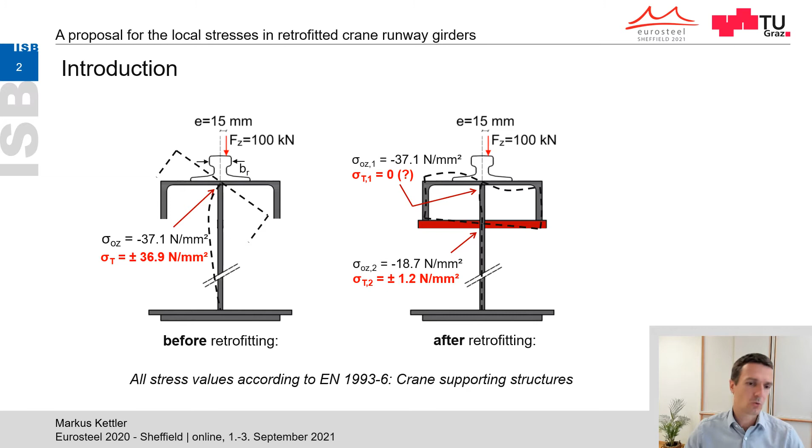So we started with finite element calculations. You see here the finite element model before retrofitting. So the girder without reinforcement plates, loaded again with 100 kilonewton, and in the diagrams we see the results. We see the vertical compression stresses over the length of the girder. So x0 means the position of the load introduction, and we have the results for 2 positions.

On the left we have it for position 1, which is within the box section upper flange, and position 2 is 30 millimeters below the reinforcement plates. Notice the shown results are without reinforcement plates, these dashed lines. We see the distribution of the compression stresses from concentric loading in the mid plane of the web, and on the compression side we see larger stresses.

So this part here between the red and the green, this is the additional torsional part that can be seen here. And in position 2 we have more or less the same behavior. We have smaller stresses in compression from concentric loading and also smaller torsional parts. If we now add these reinforcement plates, so after retrofitting, we get the following results.

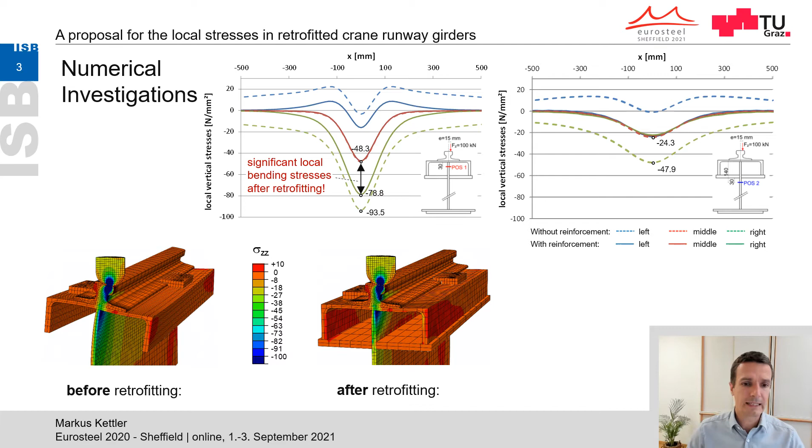So we moved on and did experimental tests on the real girder. We see the girder here, and in the right photo we see the eccentric load introduction on the rail with this device. We see here the reinforcement plates, and the left photo is taken from below, and we can see the strain gauges that have been applied.

So these 3 strain gauges here are the measurement devices below the reinforcement plates, and these 3 ones are within the box section upper flange. Notice we had to cut a small hole into the reinforcement plates to be able to install the devices.

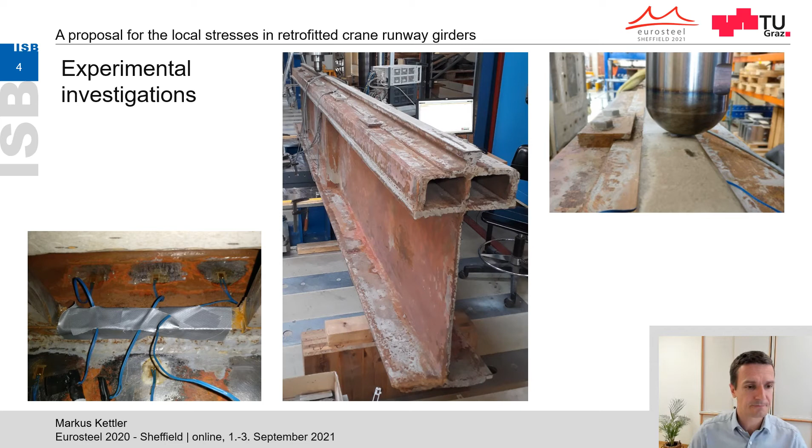These are the geometric properties of the girder. The tested part had a span of approximately 2.2 meters, and we had here transverse stiffeners at the supports, loading in the middle. The height of the girder is approximately 750 millimeters.

The rail is an A55 rail, and it was measured in detail, as you can see here, and the abrasion was approximately 3 millimeters. These geometric properties, as well as the properties of the geometry of the weld and the web plate and the upper flange, were taken into account in the finite element models.

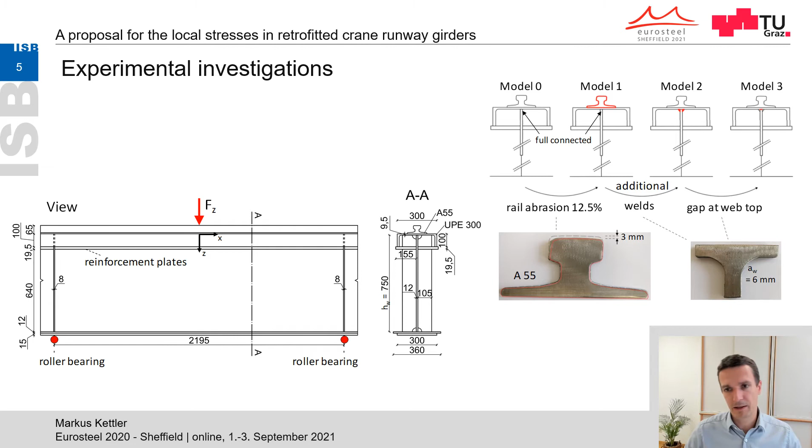Here we see the applied strain gauges. In total we had 12 strain gauges installed, 6 at position 1, these are the red ones within the box section upper flange, and 6 in blue at position 2 below the reinforcement plates, 3 on each side. Here again you can see the small hole that was cut into the reinforcement plates.

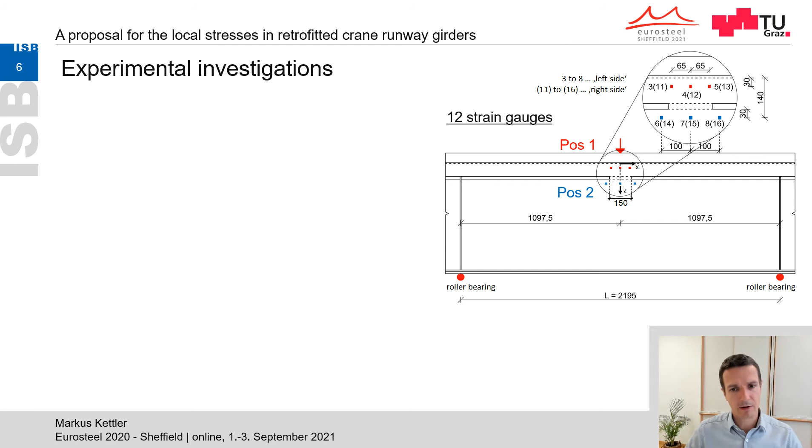To the results for position 1, this is within the box section upper flange. Again, the solid lines are the numerical results, and we see here the measurement values. So this is the girder after retrofitting, so at the end of its lifetime, and we still see within the box section upper flange significant bending stresses. So now it is confirmed not only numerically but also experimentally that we have significant bending stresses within this box section upper flange.

At the same time, on position 2, we find that there are hardly any bending stresses, so we have more or less the same results on both sides of the web. This is in line with the Eurocode predictions and with the numerical results. So we can pretty much ignore the bending stresses below the reinforcement plates.

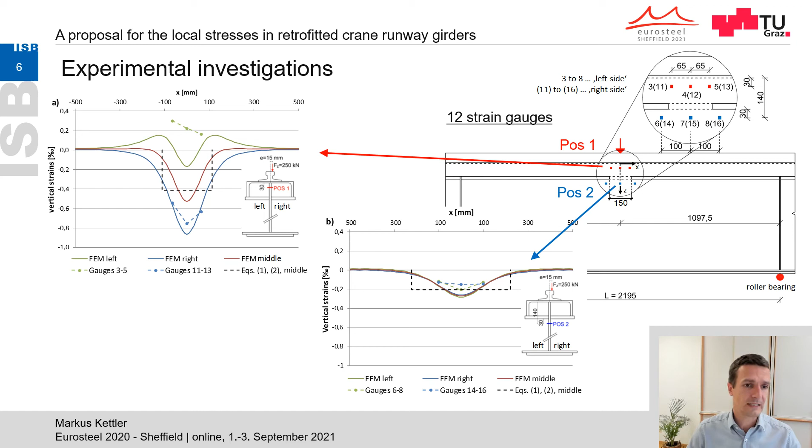However, we need a proposal how to calculate these bending stresses within the box section upper flange, and therefore we developed such a model. Actually, it's quite simple. It consists of the upper flange, in our case it was a U section, and the reinforcement plates. Together they build this box section, and this box section should be modeled as a frame in a structural engineering software with beam elements, considering the actual thickness of each of these plates in the cross section.

And the support is simply supported at the top junction and simply supported at the bottom junction, and the loading is the moment M, which is the wheel load Fz times the eccentricity. And the result of this calculation is the moment distribution M web, which we can see here, over the web height.

Notice that the result M web is independent of the length the engineer chooses in longitudinal direction of the girder. So you can take 1 centimeter or 1 meter. We just want to know the moment here. So it's independent. However, we also want to calculate the stresses, sigma, in the web plate. Therefore, we have to divide the moment, M web, by an appropriate section modulus.

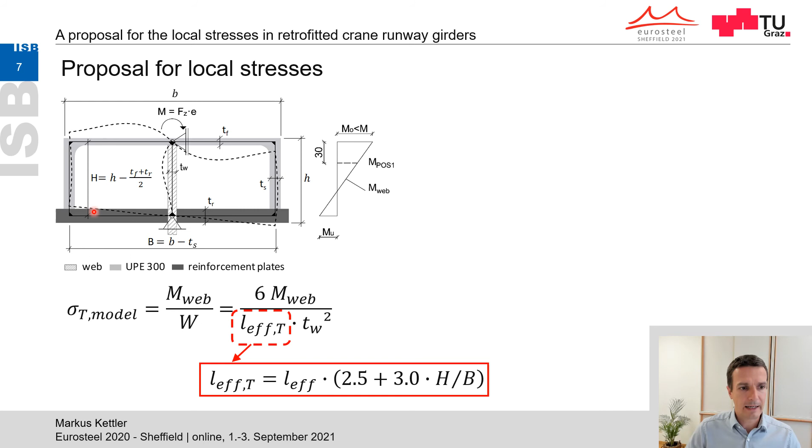And this is defined by L effective T. This is our calibration function. This is the effective length in longitudinal direction times the thickness squared divided by 6. And L effective T is proposed as L effective, which is the effective length of the concentric case. This parameter already exists and can be calculated according to the Eurocode. L effective times a function of h over b, where h is the height of the box section and b is the width.

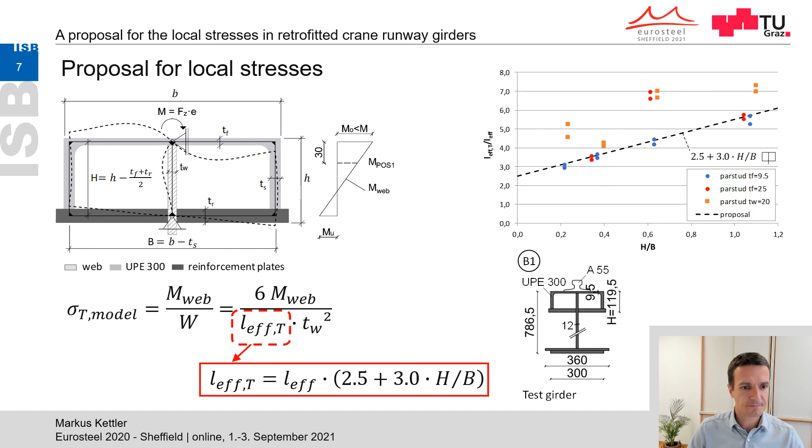As a remark, in the meantime, we also proposed a corresponding design formula for the case of a triangular reinforced upper flange. This is a more common approach nowadays for modern crane runway girders. Notice the L effective formula is slightly different, but the main system stays the same. For further information, please check out the following reference.

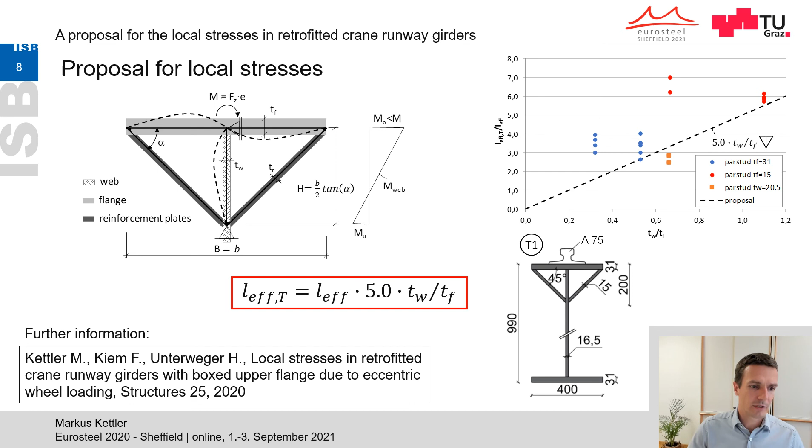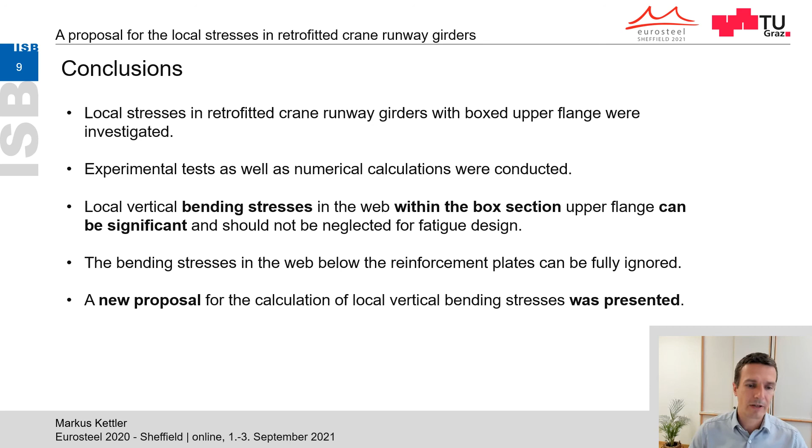Concluding, local stresses have been investigated by experimental tests and numerical calculations. And this is the main point: the local bending stresses in the web within the box section upper flange can be significant and should not be ignored for a fatigue design. However, the bending stresses below the reinforcement plates can fully be ignored. And finally, a new proposal for the calculation of the local vertical bending stresses was presented.